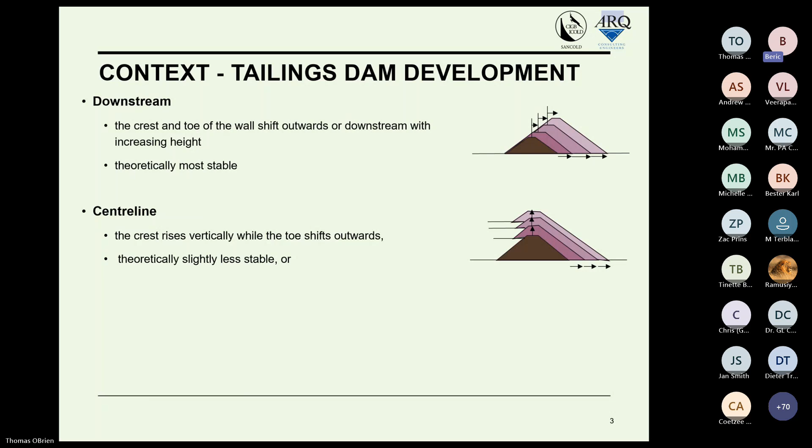And theoretically, this is slightly less stable because on the upstream side, you have essentially a near vertical face.

So upstream dams in South Africa have been developed in this manner, predominantly. Over 99% of them are upstream dams. And the reason for this is that the terrain in which they are developed is predominantly flat, mostly on the high veld and similar areas.

There are no valleys, and so this requires a ring dike dam, a containment wall around the whole impoundment. These long walls require a lot of material to form, which the deep underground mines that generate the waste generally provide insufficient waste rock to actually form the ring dike impoundment walls.

So then what happened is, in the semi-arid environment, the early pioneers found that the sun dried out the tailings very quickly, making these tailings a suitable material with which to actually raise the dam. And so we didn't need to build impoundment walls with any other material.

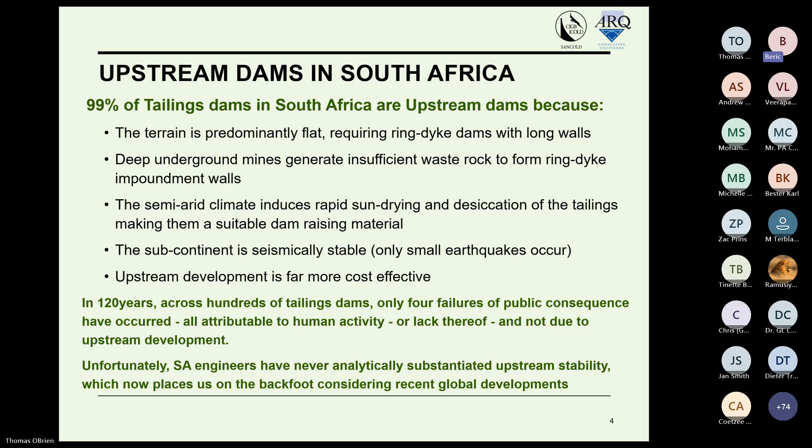Unfortunately, though, South African engineers have never analytically substantiated upstream stability. And this has now placed us on a back foot when it comes to the global developments that have happened in the last few years.

So, which is the bad rap that upstream tailings dams have now been experiencing. And this came about because in February 2019, the Feijão tailings dam in Brazil, near the town of Brumadinho, failed spectacularly. And that was also on public social media.

And so there was a huge public outcry, and the Brazilian politicians moved very quickly to ban upstream tailings dams. The investment agencies and the insurers, to protect investor value and profitability, exerted pressure on the mines to get their act together through the initiation of what is called the Global Tailings Initiative.

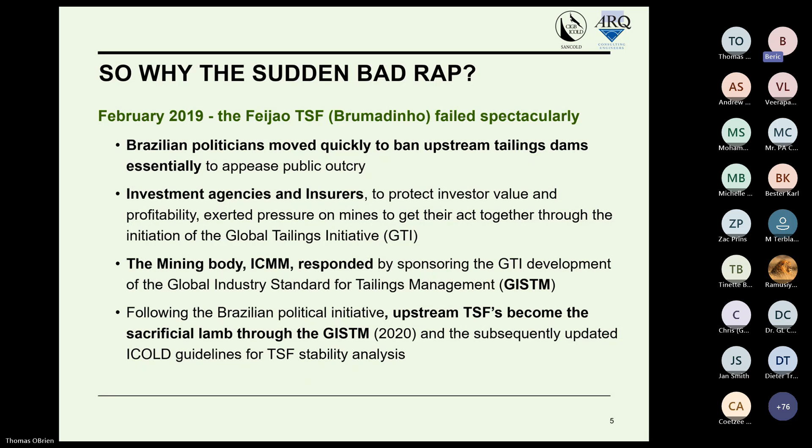And a mining body, the ICMM, responded by actually sponsoring the GTI in the development of what has come out as the global industry standard for tailings management, the GISTM. And following the Brazilian political initiative of banning upstream tailings dams, upstream TSFs became the sacrificial lamb in this document and the subsequently updated ICOLD guidelines for tailings dam stability.

So looking at this in a little bit more detail, the GISTM does not ban upstream dams outright, but it imposes criteria and standards that are virtually impossible to meet.

Particularly, the guide requires a factor of safety of greater than 1.1 when assuming post-liquefaction residual strength. This is the strength that happens after failure. And then putting that into a limit equilibrium analysis. When you put those two together, it's virtually impossible to achieve that factor of safety requirement.

So why did the GISTM assume residual strength and limit equilibrium methods? Well, the guide is motivated by investor and insurer interest rather than the mining company interest, with the former actually attempting to avoid the consequences of failure rather than allowing mines to engineer and manage to avoid failures.

And the reason that GISTM followed this approach is because historically the mining industry has not looked after or managed its facilities adequately, and are now facing the consequences of it.

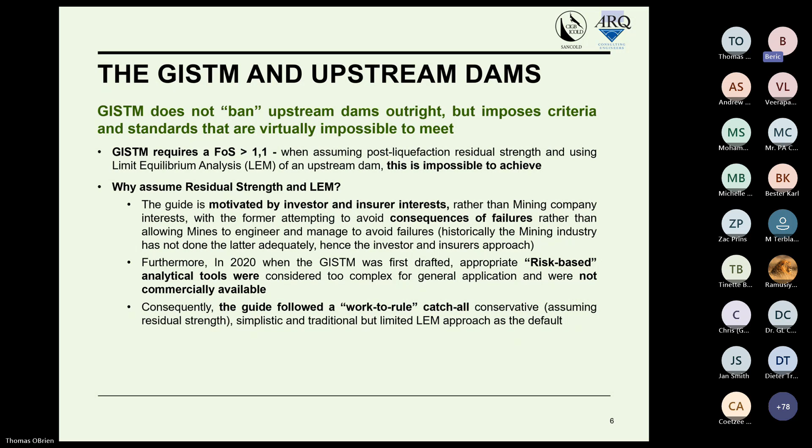Furthermore, in 2020, when the GISTM was first drafted, appropriate risk-based analytical tools were considered too complex for general application and were not commercially available. So consequently, the guide followed a sort of work-to-rule, catch-all, very conservative approach, assuming residual strengths, and the simplistic and traditional but limited limit equilibrium modeling approach as the default.

So where does this leave upstream tailings dams?

No upstream tailings dam can actually meet the GISTM criteria. But does this new standard suddenly make all upstream tailings dams unsafe? While the hazard and potential to cause harm exists, the South African record of around 50,000 tailings dam years, with only 4 failures of consequence, demonstrates otherwise. These tailings dams are not unsafe.

Condemnation of upstream dams may be largely immaterial globally, but they're hugely significant in South Africa to the economy, where more than 99% of facilities are developed in this manner. So some South African mines are in a quandary. They want to comply with global standards, but historic practice and international guidelines leave them in an impossible corner, with unattainable requirements and no alternative engineering options allowed.

So what can South African mines actually do now? We are suggesting that, contrary to the GISTM default approach, one should rather adopt a risk-based approach, which is actually allowed indirectly through the draft SANS 10286 Code of Practice. The GISTM work-to-rule approach is very prescriptive, it basically disempowers engineers and owners. It obviates owners, executives and engineers from applying their minds, they just have to follow rules. And so it basically lacks technical integrity, and is not an assured approach to risk management.

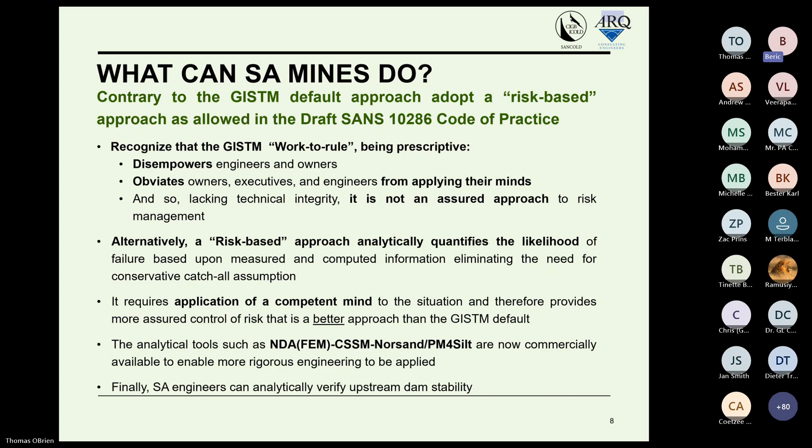So hopefully that provides you with some context as to why we are talking about this subject today. I'm going to hand over to Thomas now, who will take you through the analytical framework of how we actually go about undertaking the verification of the upstream stability.

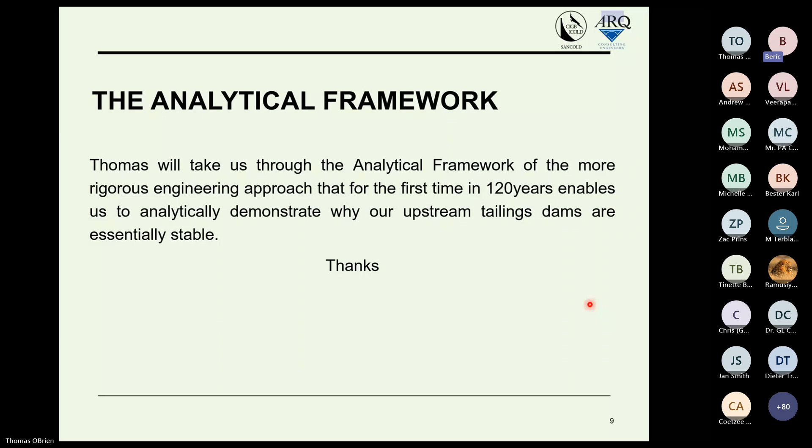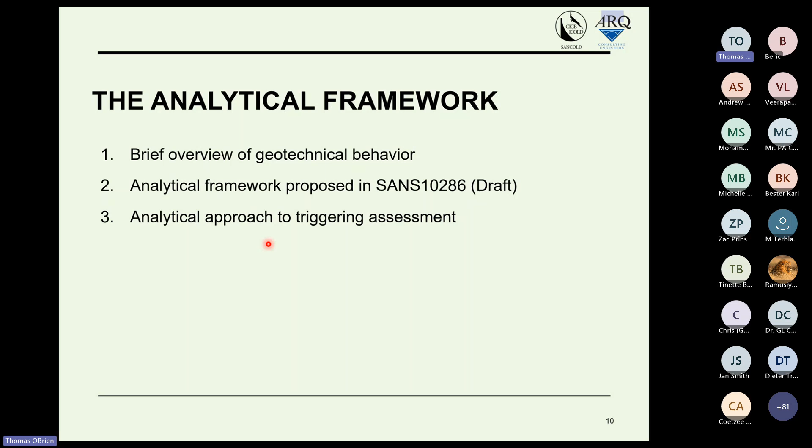Thank you, Thomas. Thanks for that, Beric. That's a very comprehensive summary, and good afternoon to everyone. I have the task of basically proving what Beric proposes to be possible. To accomplish that, I'd like to give a brief overview of some of the geotechnical behaviors concerned. For those of you who are geotechnical engineers, I apologize if a lot of it you already know, but for our audience I believe not everyone will be familiar, so there's value in it. Then we'll look at the analytical framework proposed by the SANS 10286 draft as an analytical approach for assessment.

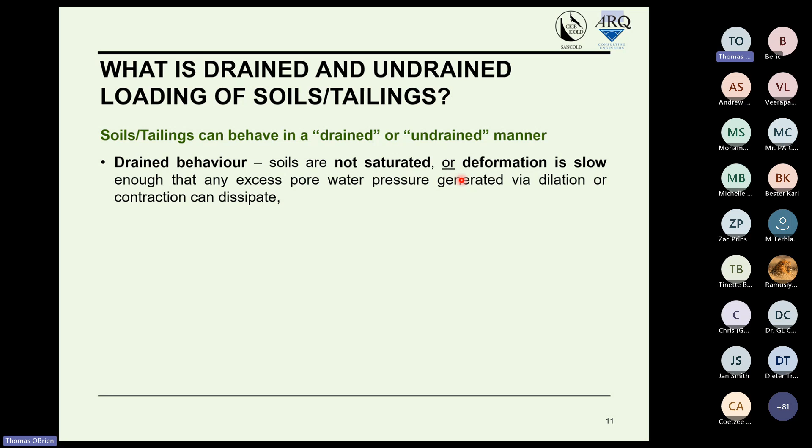And then we'll look at some of the modeling techniques used, as Beric mentioned, FEM over LEM and so on, to conduct triggering assessments. So let's take a look at some soil behaviors for overall orientation. Soils and tailings can behave in a drained or an undrained manner. In drained behavior, soils are either not saturated or deformation is slow enough to allow excess pore water pressures to dissipate. For undrained behavior to manifest, soils must be saturated and must also be sheared fast enough that excess pore pressures caused during dilation or contraction don't dissipate.

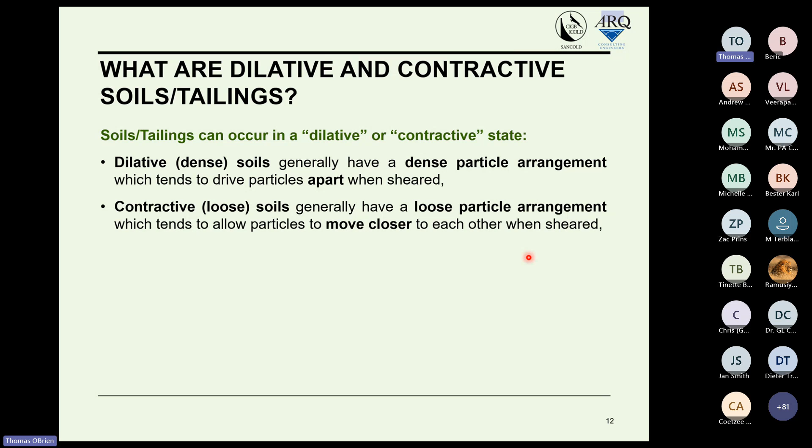So you might then ask, what are these dilation and contraction terms that I've mentioned? Basically, a dilative soil is a dense soil, which will make more sense later in the presentation. They generally have a dense particle arrangement, which tends to drive particles away from each other when the soil is sheared. Conversely, a contractive soil, or a loose soil, has a loose particle arrangement, which tends to allow particles to move closer to one another when the soil is sheared.

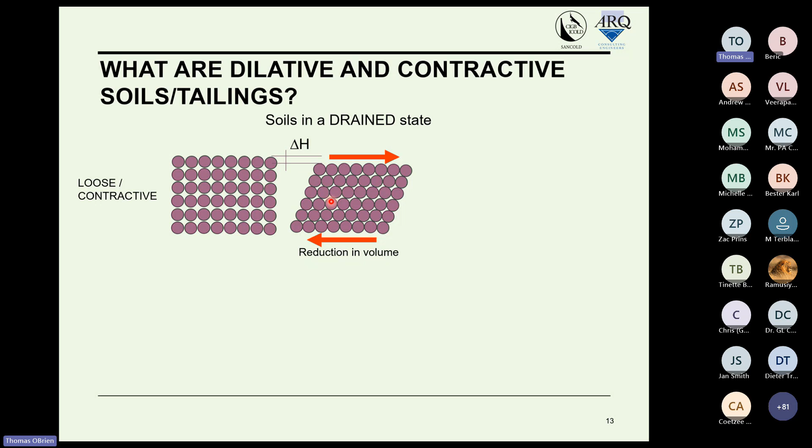It's helpful to visualize that by looking at the drained conditions. For a loose material, you'll note diagrammatically we've represented a loose soil with grains not packed very close together, but still making contact. When that soil mass is sheared, the particles are able to move closer to one another, so in the sample you get a decrease in height. In the actual tailings dam or soil mass, that would be associated with a decrease in overall volume, and an increase in shear strength with strain. Then looking at a dense state, a dense arrangement of particles, as you can see, they're much denser.

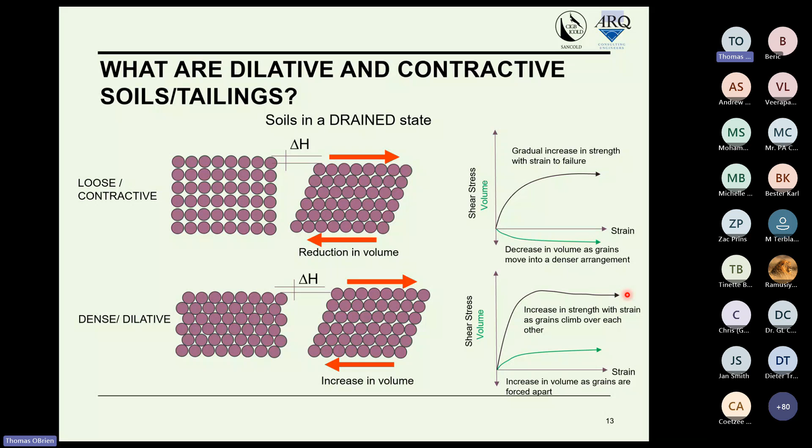When that is sheared in a drained fashion, the particles are forced to climb over one another during the shear deformation. And so you actually experience an increase in volume in the drained state, as you can see there by the green line. Also the shear strength increases and plateaus off at some high value because of the dense arrangement.

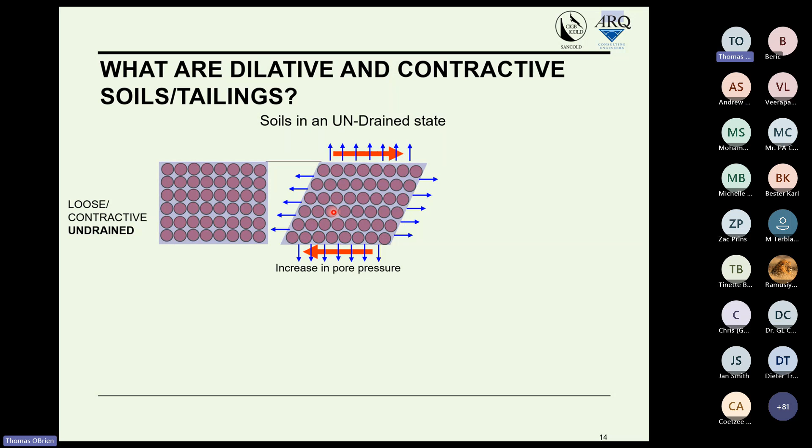Then we can look at the undrained behavior, and this is applicable to tailings dams because many of the structural zones are saturated. So again, we start by looking at a loose arrangement of particles or grains. When these are sheared, they want to move closer to one another because of their loose arrangement, but because they are housed within incompressible water, the volume can't change like it does during drained shear. And so the water actually takes on a pressure because of the will to decrease volume.

That increased pore water pressure actually reduces effective strength, or effective stress, and therefore strength. So this is the typical stress strain behavior of a loose material sheared in an undrained manner, where we have a peak and the strength then dropping down to a residual value. Corresponding with that, we see an increase in pore water pressure.

A much more desirable situation is if you have a dense material. When that's sheared in an undrained manner, the particles attempt to climb over one another because it started dense, but they can't climb over one another because the water actually goes into suction, and that suction holds the soil together and makes it very strong. So in that scenario, we see a decrease in pore water pressure, which is associated with an increase in effective stress and therefore strength. So there's no peak and residual.

You have finally, when that material does fail, it's quite strong, and it also fails on a plateau. So that's just a recap of those 4 scenarios. Apologies again, if you are already experienced geotechnical engineers, that's old news, but perhaps a recap doesn't hurt.

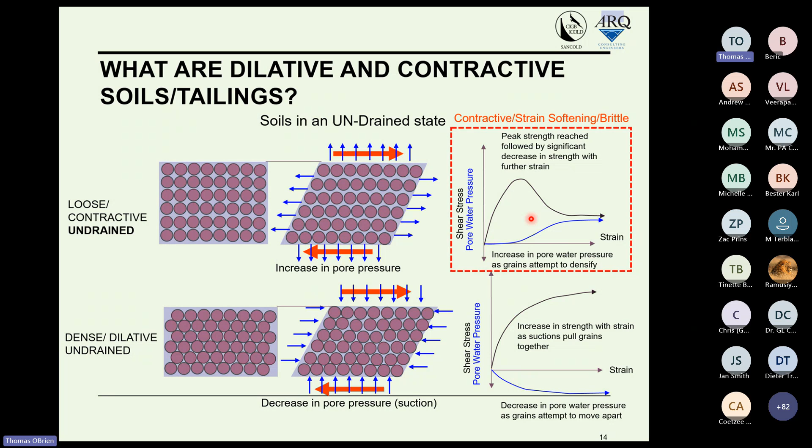The whole stability of these upstream tailings dams really hinges around one of the 4 permutations, the undrained shear of loose materials, where we have a peak and a residual. So if we are dealing with a loose or a contractive material, you still get different degrees of looseness or strain softening. I'd like to just elaborate on some principles there.

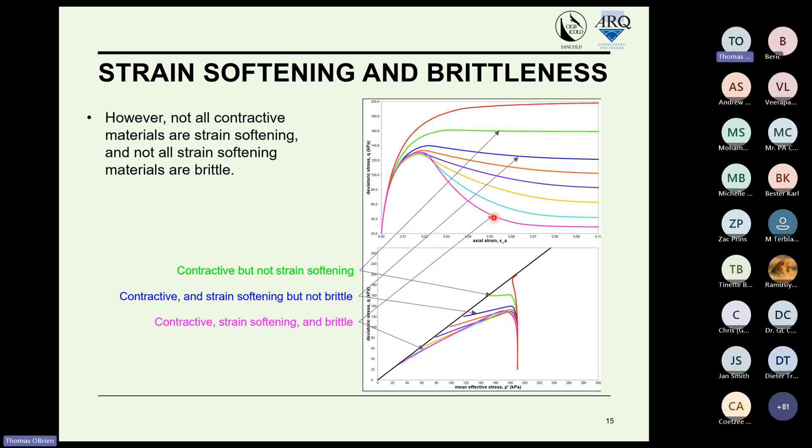And then the third case, which is contractive, strain softening, and brittle. As you'll see on the next slide, that last term, brittleness, basically refers to the amount of strength which is lost between the peak and the residual.

So the ICOLD Bulletin 194 has basically classed brittleness in 3 categories. If you are losing less than 20% of your strength, you are generally not brittle. If you're losing between 20 and 40% of your strength, you are in a moderately brittle scenario. And if you are losing more than 40% strength, you are highly brittle.

And that's important to understand because you obviously need to take precautions and perform proper assessments if you're dealing with something that is highly brittle, because there is the potential for liquefaction and it needs to be properly assessed.

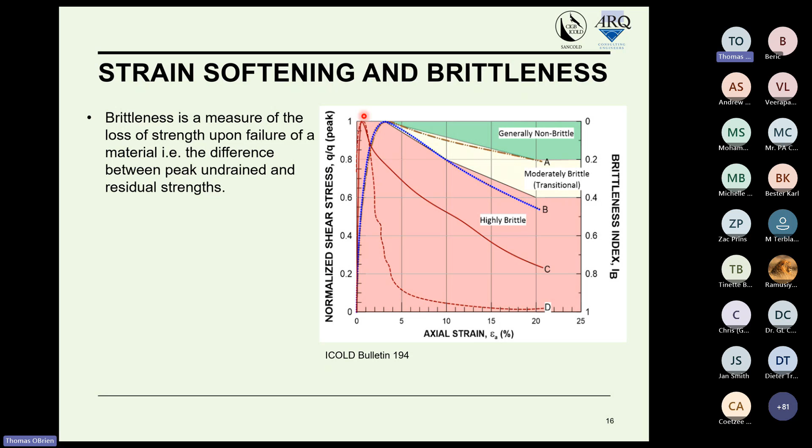For interest's sake, for those who haven't read the ICOLD Bulletin 194, this dashed line is actually the stress-strain relationship for a tailings sample tested from the Brumadinho failure, which Beric mentioned in his presentation, and that was a catastrophic liquefaction failure. You can see that material, when strained beyond its peak strength, really just liquefying and losing almost all of its strength.

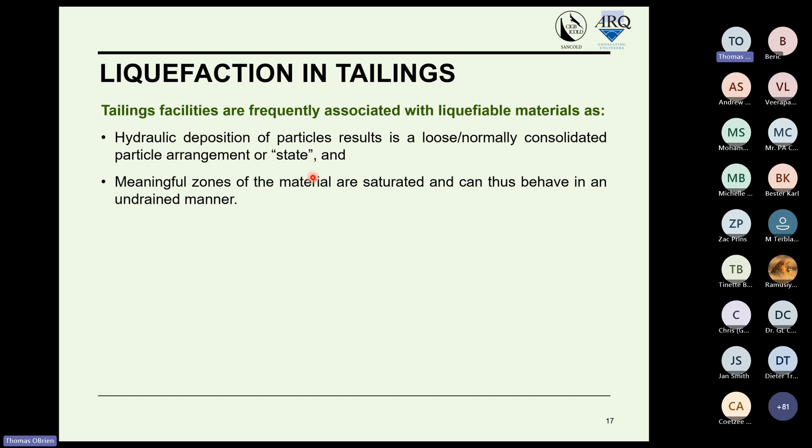So you may ask, why are tailings materials subject to liquefaction? Well, the hydraulic deposition of particles results in a loose or normally consolidated particle arrangement, and meaningful zones of the material are saturated, which can behave in an undrained manner. Therefore, if failure occurs, it is often associated with some degree of liquefaction.

So at this point, I'd like to take a closer look at two types of failure: static liquefaction and dynamic liquefaction. The diagrams I'm going to show you are not taken from any reference literature. They are my understanding of how these failures progress, and might be interesting to discuss after the webinar.

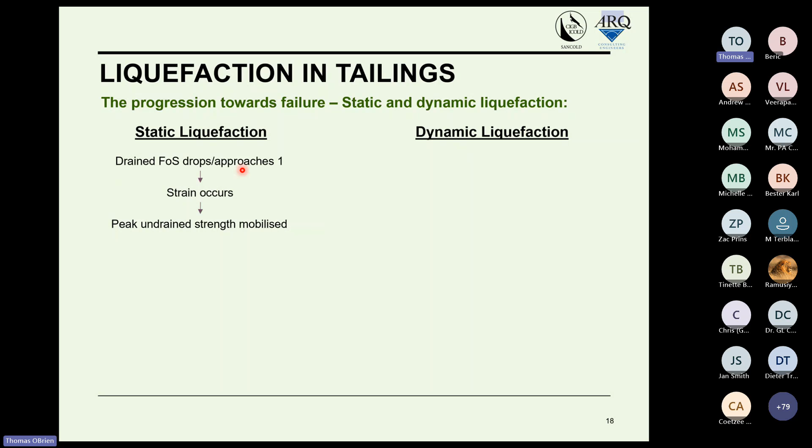Taking a look at static liquefaction, in my view, you must be in a situation where your drained factor of safety drops or approaches 1. Because of that, strains and movement occur. The movement mobilizes undrained strengths, which are peak undrained strengths at first. Then, if the peak undrained strengths are smaller than the stress or load, further movement occurs and residual undrained strengths are mobilized. If your material is brittle, then your residual undrained factor of safety will be much smaller than 1, and you'll have instability and flow failure.

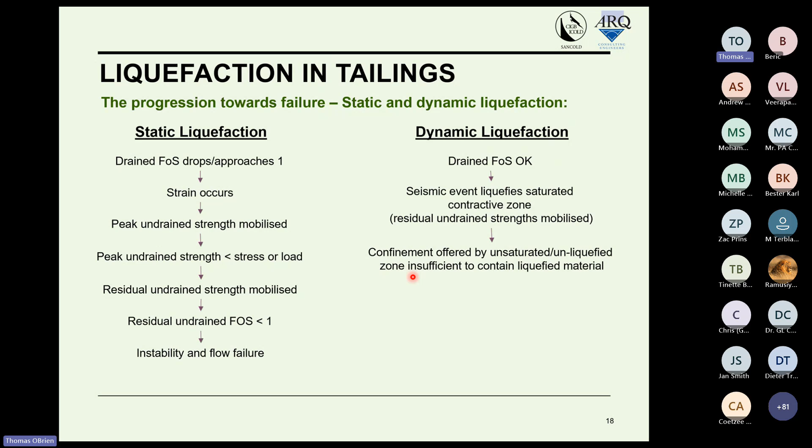Dynamic liquefaction, on the other hand, triggered by a seismic or earthquake event, has a slightly different mechanism. Your drained factor of safety can be okay, and then a seismic event can be experienced, which causes contraction in your saturated zones, and residual undrained strengths can be mobilized outright without first moving through a movement scenario, as with the static liquefaction case. The confinement offered by the unsaturated or unliquefied zone is insufficient to contain the liquefied material. Your global factor of safety drops below 1, and instability and flow failure can occur.

So in summary, it's important to note that in the static liquefaction case, you have failure first through several gates, as I call them, followed ultimately by a liquefaction flow failure. Whereas on the dynamic liquefaction front, you can have direct liquefaction first. In other words, the seismic event targets the saturated tailings material where it is, and causes it to go to a residual strength state, and then the outer wall can't contain that liquefied material, so it bursts essentially. Those are the distinctions between static and dynamic liquefaction.

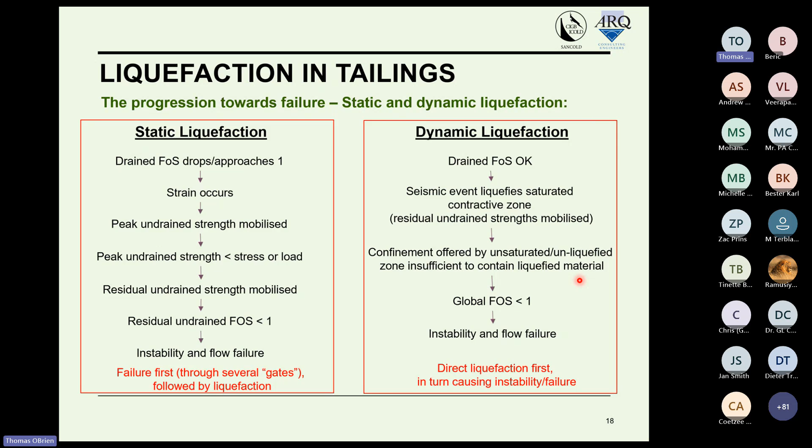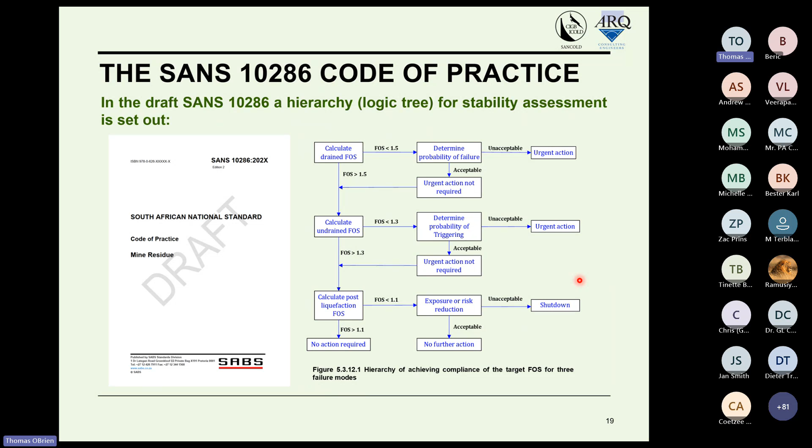So the new SANS 10286, although it's still in draft, I understand the document will shortly go out for public comment, and if there aren't significant public comments, it would be formalized in a state very similar to present. That document basically sets up a framework for assessment, which we are already using to assess stability of tailings dams, and this is more or less the flow that follows.

So the drained analysis is the first step, and defines the safety level that prevails in the absence of a trigger—the normal steady state scenario. As long as this is sufficiently high, the system does not move and does not mobilize undrained shear strengths. Here, the target for the factor of safety is 1.5, and if you have that, you're okay.

However, if your factor of safety is smaller than 1.5, the code makes provision for you to check for the probability of failure, and there are many references that can be used. KK Phoon has done a lot of work on reliability-based design. If you don't have a large standard deviation around your mean in terms of material strengths, you can have a factor of safety slightly below 1.5 and still have very good reliability—a very small probability of failure because of the predictableness of your materials. So that's the first drained assessment.

Then the stability analyst or designer must move to consider the peak undrained analysis as the second step. That defines the factor of safety that prevails in the presence of a trigger. By applying undrained shear strength properties in the model, we assume that the material is at peak undrained strength state.

So remember, we're still talking about the simplistic or old school stability analysis approach here. So we are assuming material parameters. So for this peak undrained state, we assume that all of our saturated contractive material is at the peak undrained, or in the peak undrained condition there. We require a factor of safety of 1.3.

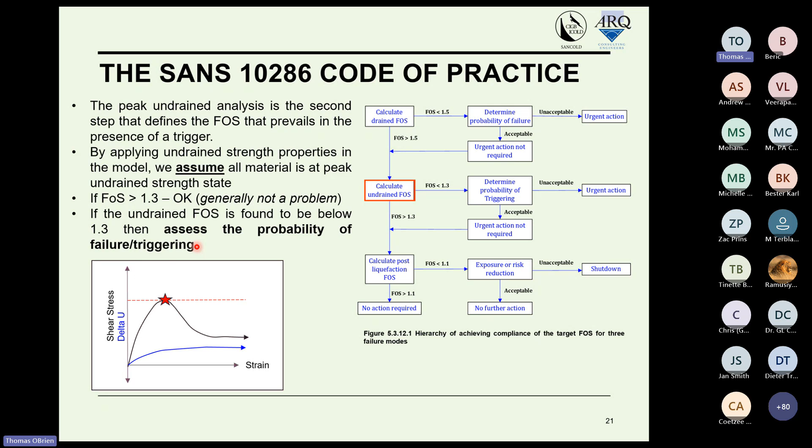This is not normally a problem even for our upstream dams to obtain 1.3 for that. However, again, SANS 10286 does make provision for assessment of probability of triggering if you don't quite meet that 1.3. However, I believe that 1.3 should be targeted.

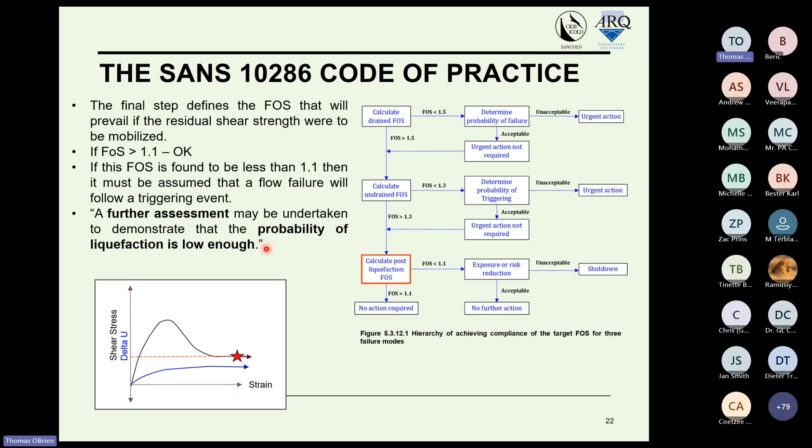However, if you're below that, a further assessment may be undertaken to demonstrate that the probability of liquefaction is low enough. And that really is the triggering analysis that we are hosting this webinar to address.

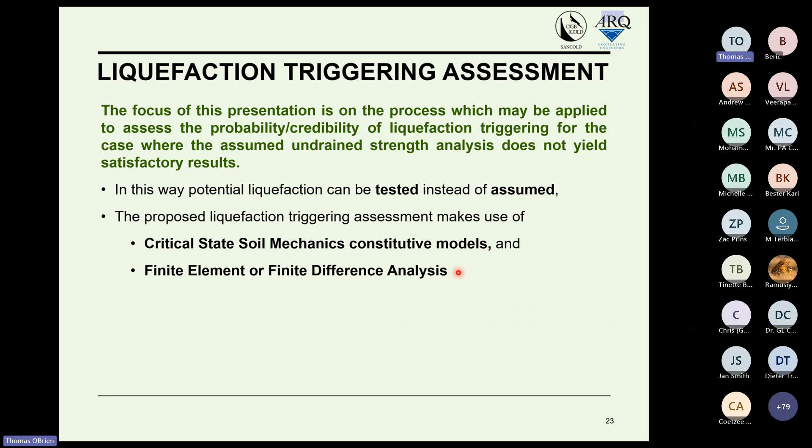And so to address or to test for triggering, instead of assuming residual undrained strength conditions, we need two things really. We need to employ the critical state soil mechanics constitutive model, and we need to use suitable software and analytical techniques, namely finite element or finite difference analysis. The old school limit equilibrium methods, or LEM, aren't able to fully consider the required constitutive models for triggering assessments.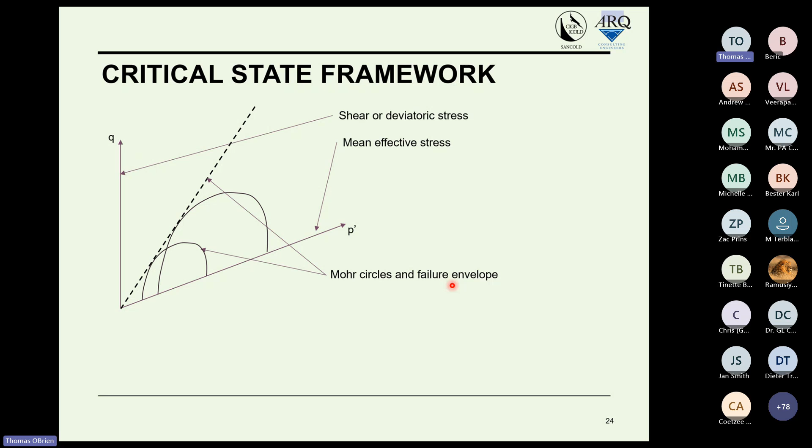So let's take a look at this critical state framework. So the PQ stress space might be familiar to you. On the vertical axis, we have the shear or deviatoric stress, and on the horizontal axis, we have the mean effective stress. That might be familiar to you because that's the stress space on which we normally plot the Mohr circles and the failure envelope.

Essentially, the critical state framework adds a third dimension to the constitutive model to introduce density or void ratio. The two are interchangeable there. So we go from a two-dimensional constitutive model, only suitable for simplistic analyses with assumed strength conditions, to an advanced critical state framework, which is able to consider changes in density and void ratio.

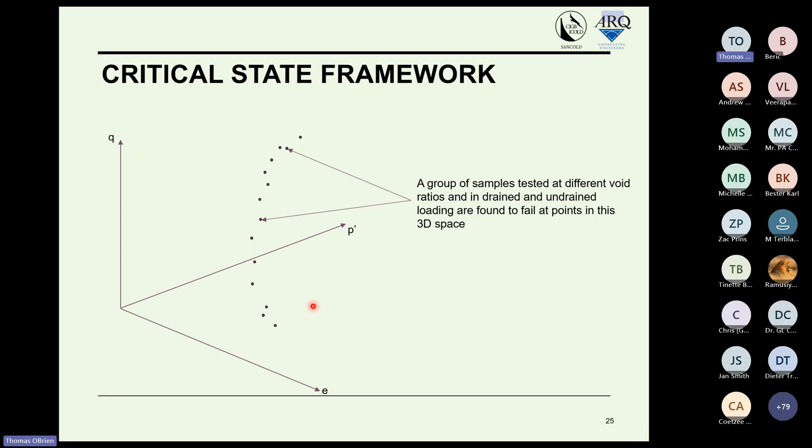So essentially, if you were to take a group of samples and test them at different void ratios and in drained and undrained load scenarios, and plot their failure points in 3D space, you would see a series or a band of points, something like what I've shown on my slide here. These points basically align to form a failure line, and this is what we call the critical state line, critical state locus, the CSL. Quite a buzzword nowadays - I'm sure you have heard about it.

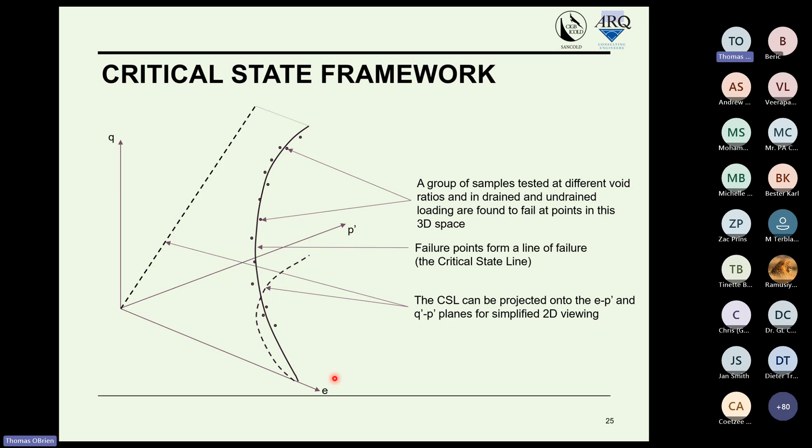And then to simplify visualization of behaviors, we tend to simplify this 3D model into two 2D viewing planes. So we'll frequently look at the QP plane - as I mentioned, that's the one where you have your Mohr circles conventionally plotted. And then we also look at the PE plane, which we'll take a closer look at in some of the upcoming slides. So let's take a look at how some of these loose versus dense, drained versus undrained materials behave in this critical state framework.

So we can start by taking a look at loose, undrained shear. It's loose, which means we must be starting with quite a high void ratio - your volume of voids versus your volume of solids is quite high. So we're here. And then we shear that sample, or let's say the element in the tailings dam is sheared. Because that shear is happening in an undrained fashion, there's no change along the void ratio axis. It has to stay at one void ratio value - otherwise, it would be drained, not undrained.

And if you shear that sample to failure, it basically comes up and fails on the critical state line. So having a quick look at the projections there, on a QP space, that's our typical leftward curving stress path that we know to be a contractive material. Having a look in EP space, we note a straight line moving to and failing on the critical state line without a change in void ratio.

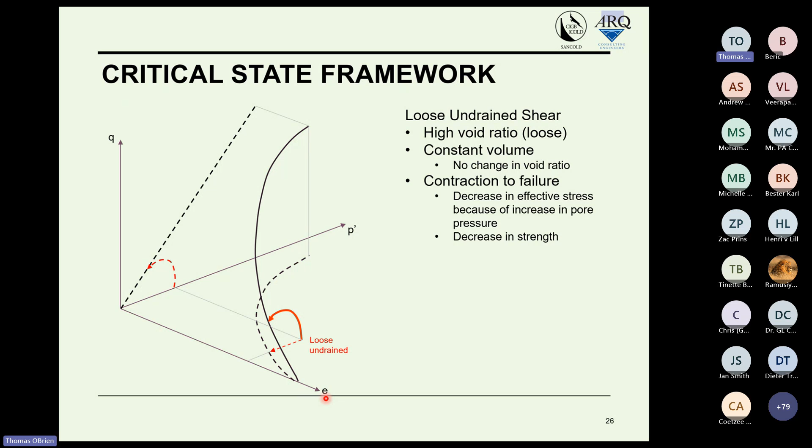The model can obviously also handle dense behavior, so dense undrained behavior in this case. Now, as I've mentioned, it's denser, so we start with a much smaller void ratio. And instead of contracting, this material, when looking at the QP plane, actually dilates up to failure. And looking at the floor of the 3D model at the EP space, again, we can't change void ratio, but we come from the other side of the critical state line and experience failure on the critical state line.

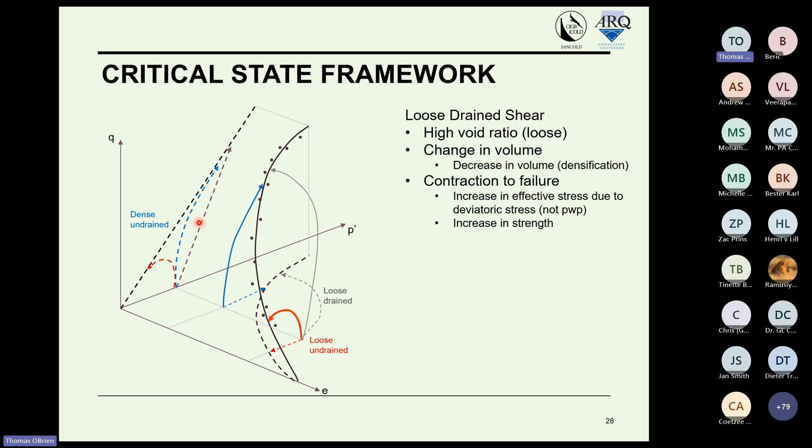Then we can look at our two drained scenarios. I won't, for time reasons, talk too much on them, but basically, because it's drained, volume can change. So our loose sample densifies and fails on the critical state line when looking at the floor of this plot. And when looking at QP space, we have a straight line stress path, which moves up and fails on the projection of the critical state line. A dense sample obviously again starts with a smaller void ratio, and also moves to fail on the critical state line, and it would follow a similar 1 in 3 gradient straight line on the QP space.

Right, so that's sort of a summary of the 3D model that we're using. And just to emphasize again, when using a critical state framework, it's not necessary to assume one of the 3 predefined material states, but rather you're able to model the movement in this 3D stress space with development of the facility and with triggers.

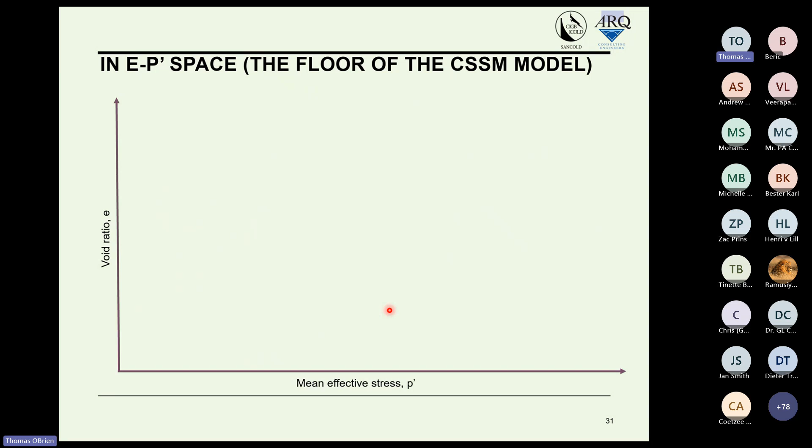All right, I believe I've just inadvertently covered those points, so I'll move over them. You might be a lot more familiar with this plot. So this is now looking at the floor of the critical state framework with void ratio on the vertical axis and mean effective stress on the horizontal axis. So we have our critical state line dividing that space.

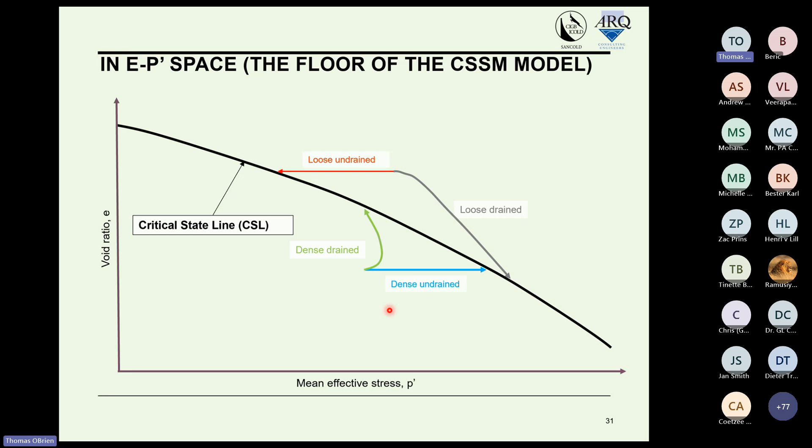As I've mentioned, the loose undrained materials are going to fail from right to left onto the critical state line, as shown there by the red arrow. Your dense undrained materials fail the other way onto the critical state line because they initially start dense of critical, not loose of critical. And then your dense drained failure also is allowed a volume change and generally moves upwards onto the critical state line.

So any element within a tailings facility can be placed either above or below the critical state line. If its void ratio in situ places it above the critical state line, then it has what we would term a positive state parameter, and we would say it's contractive. If the in situ state of an element in a tailings dam sits below the projection of the critical state line, we would say it's dilative and it has a negative state parameter, and it's not prone to liquefaction as the contractive materials are.

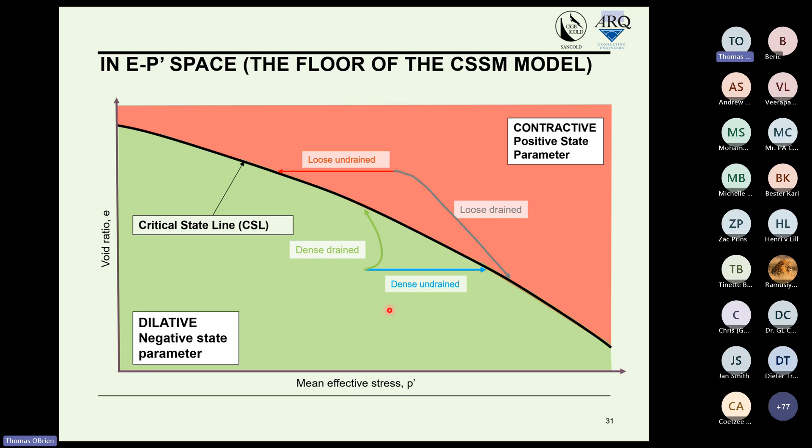Okay, so then we can move on with the constitutive models understood. I hope everyone did understand it. If you haven't had experience with it before, it can be a bit much to take in, but if you sit and have a look at some of these plots, they do start to make logical sense.

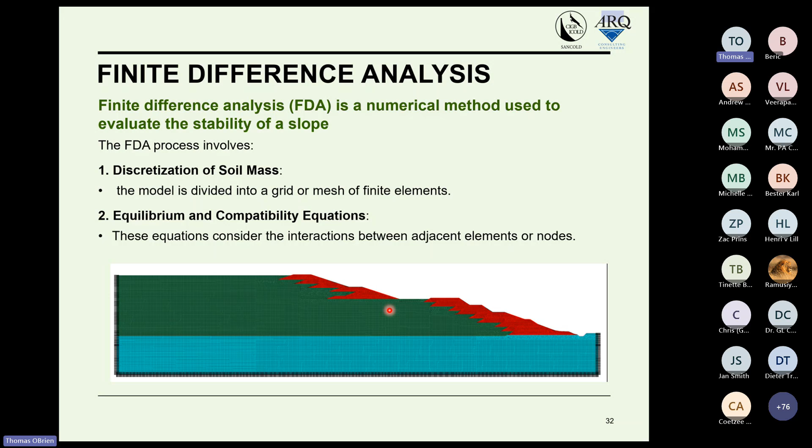But with an understanding of the constitutive models in place, we can look at the analytical methods and software. So when conducting a triggering assessment, you need to make use of a finite difference or a finite element numerical method. As I've mentioned, using LEM is not good enough. The finite difference or finite element method discretizes your soil mass into a finite number of elements, and then it applies equilibrium and compatibility equations between the elements and iteratively solves towards convergence.

You obviously need sophisticated inputs for a sophisticated analysis. They say if you're going to guess the inputs, you may as well just guess the answer, and that's completely true. So in terms of material properties, you're going to need a good understanding of strength, stiffness, and density. Katy is going to take us through some of the forms of investigation and talk through how we derive these parameters. But just know that these properties influence how the elements deform and or resist deformation under different loading conditions within the bounds of the selected constitutive model, and that the material parameters are specific to the constitutive model that you're planning to use.

So far, I've just talked about a critical state framework, but there are different models within the critical state framework, for example, Cam Clay, or PM4, NorSand, and they each have some nuances and differences there with regards to the input parameters.

So once you've understood your parameters and your modeling and you've actually computed your models, you would look at your outputs. Katy's going to show us some nice examples of outputs, but just note that your outputs are numerous and you can look at stresses, strains, and displacements.

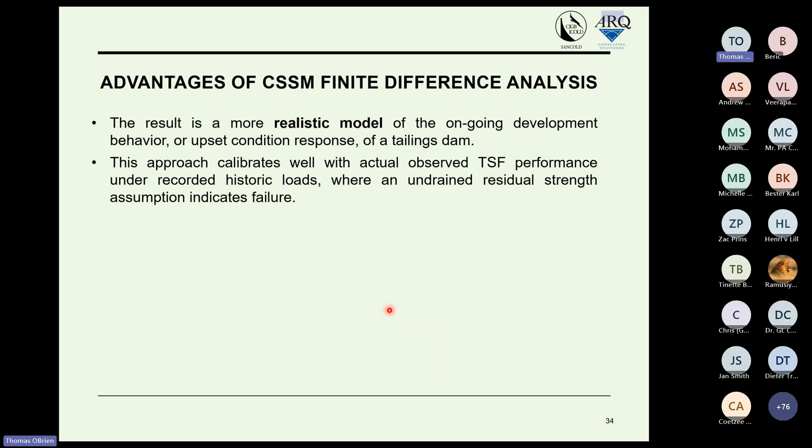So in short, the result when using a critical state finite difference software is a more realistic model of the ongoing development behavior or upset conditions of a tailings dam. This approach calibrates well with actual TSF performance under recorded historic loads, where an undrained residual strength assumption would have otherwise indicated failure. All right, so that's it from my part.

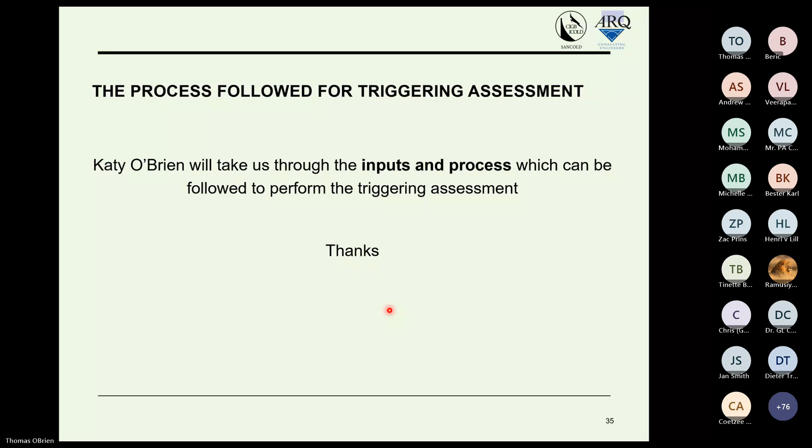I'll be going through the life cycle of triggering assessments, as Thomas just briefly mentioned. That life cycle would firstly be to conduct a site investigation, which would include the collection of samples, followed by lab testing using the samples collected during the investigation, then interpretation of the testing, calibration of constitutive models, and then developing other inputs for the analysis.

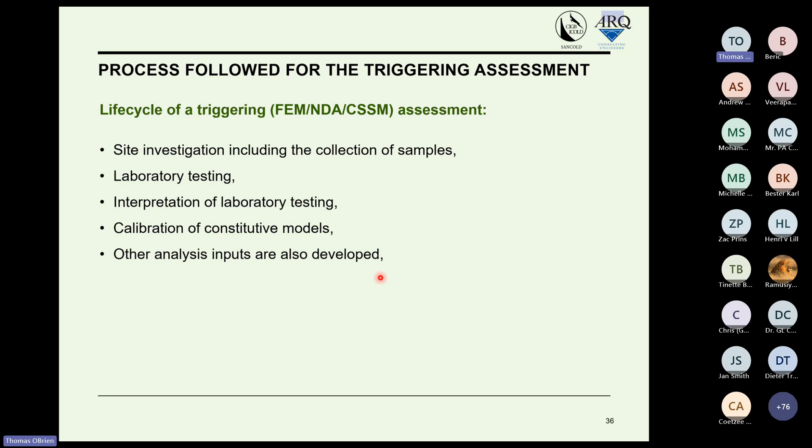All 5 of those points would be done for the purpose of developing the inputs for the actual analysis, which Thomas has mentioned will be a non-linear deformation analysis, utilizing critical state soil mechanics for the potentially liquefiable material zones. Lastly, interpretation of the results. In the upcoming slides, I'll go through each of these points individually.

Let's start off with the site investigation. One of the most important components is cone penetration testing, which gives you a very good indication of the state of your tailings. You can empirically derive the void ratio and state parameter of the tailings.

The testing also includes pore pressure dissipation tests, which allows you to calculate your at-rest pore pressures. The CPTU testing also has a seismic cone, where seismic cone tests are conducted to derive your small strain shear stiffness, so that you can develop a stiffness profile with depth throughout the tailings dam.

Rotary core drilling is also commonly conducted, which allows for the collection of undisturbed samples in the tailings dam. Quite often the rotary core drilling is advanced through the tailings dam and down into the foundation, which allows for collection of foundation samples, and also for testing like SPT testing in the foundation to give an indication of stiffness.

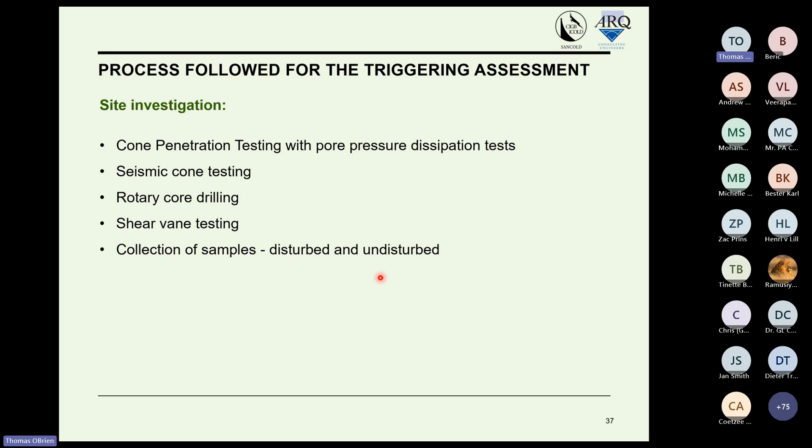It should be noted that the contractor that conducts the site investigation is responsible for actually doing the work on site and recording the data, but they do not interpret the results. It is the responsibility of the engineer to do this and to specify where tests are required and would provide the most meaningful output.

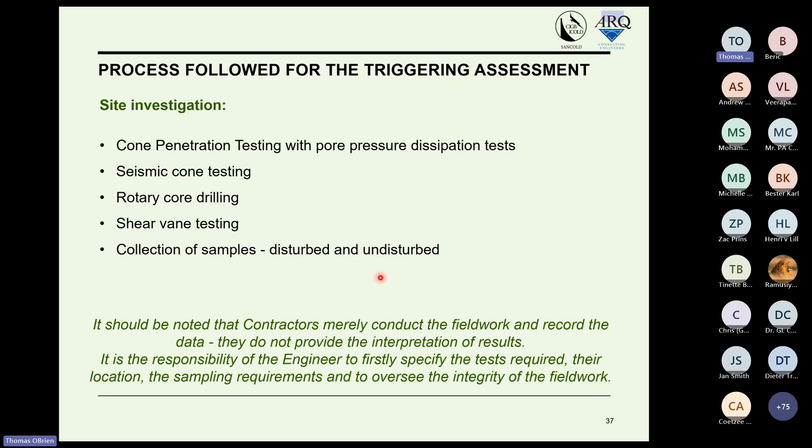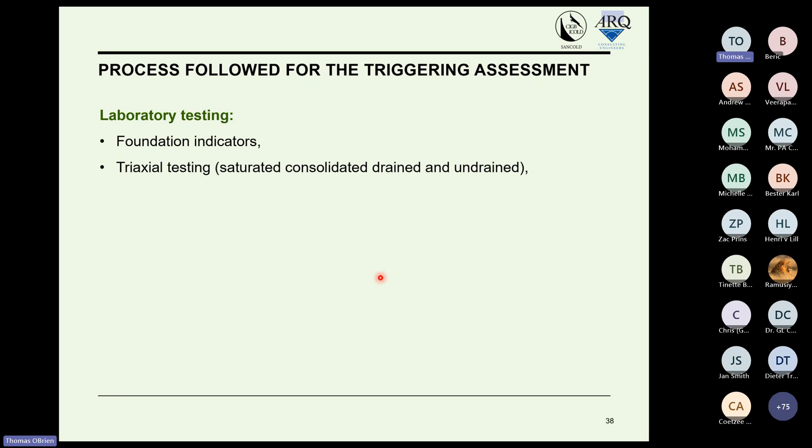Moving on to lab tests. We commonly conduct foundation indicator tests, triaxial tests, which could either be drained or undrained, slurry consolidometers, flexible wall permeability tests, monotonic direct simple shear (MDSS) tests, and cyclic direct simple shear (CDSS) tests.

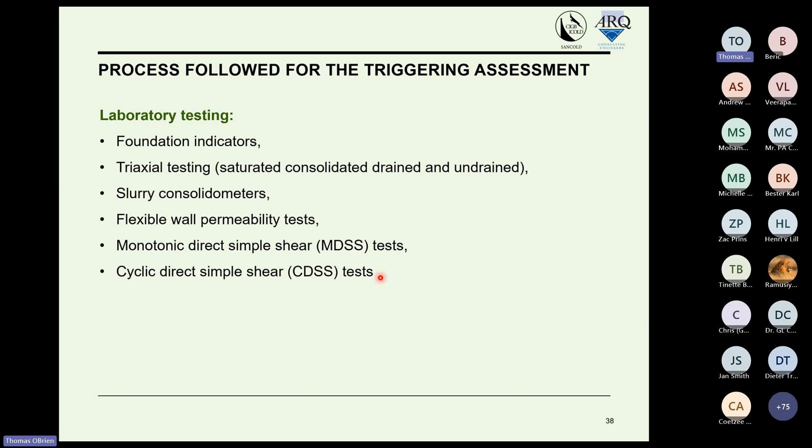With all of these tests, you can fully define a material's behavior in terms of consolidation, permeability, and strength. Once again, it should be noted that the lab merely conducts the lab test and records the data. They do not provide the interpretation, because this is the responsibility of the engineer, who specifies what tests should be conducted and then interprets the results once they are complete.

Let's go through the interpretation of some lab tests. This is not in terms of the critical state framework that I'll be going through in some of the upcoming slides. This is just general lab test interpretations.

This plot on the top left of the slide is a plot of hydraulic conductivity versus void ratio obtained through flexible wall permeability tests. Each discrete point is a separate test, and the different colors represent different material types. Typically we would use these test results to derive trends of permeability versus void ratio, as shown by the red line plotted through the dark red points for the overflow material in this instance. We would then use these relationships or trends as input into our analyses.

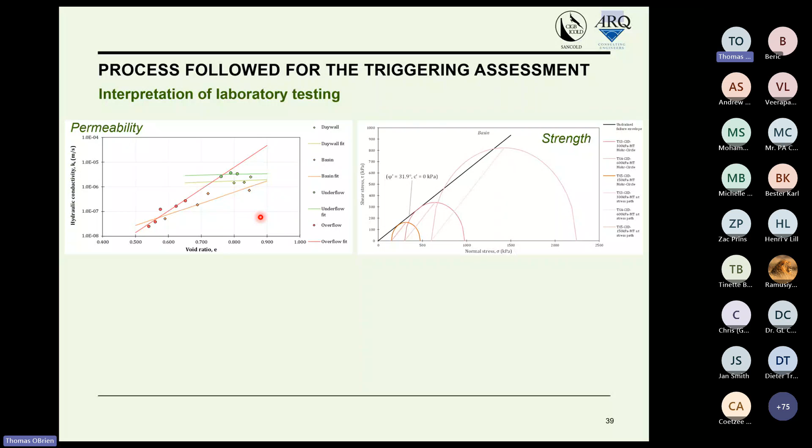The second plot is a derivation of Mohr-Coulomb shear strength parameters using the Mohr-Coulomb circles with the failure envelope drawn tangential, and a friction angle of 31.9 and cohesion of 0 were derived.

Lastly, these are the outputs of some CDSS tests conducted on two different material types, one red and one orange. As would be expected, looking at the cyclic stress ratio, which is the aggressiveness of the shear or the amount of shear applied to the sample, we see that as the CSR increases, the number of cycles to failure on the sample decreases.

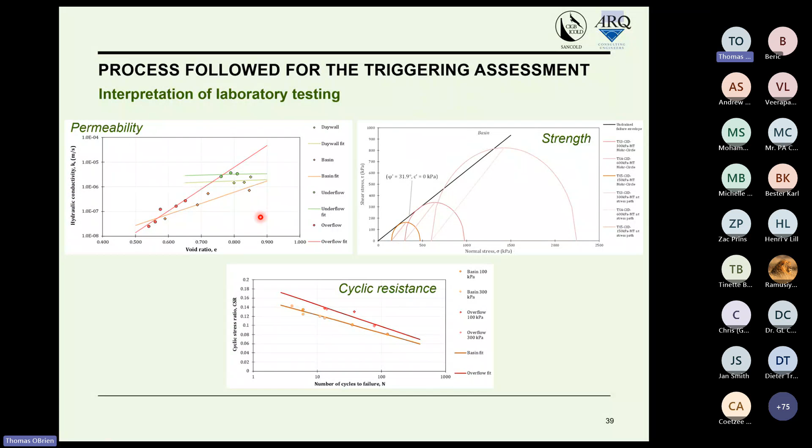Let's move on to the calibration of the critical state constitutive models. We make use of two CSSM constitutive models, NORSAND, which we use for potential static triggers or static stability assessments, and PM4 SILT, which is used for dynamic or seismic potential triggers.

The NORSAND model requires 8 main input parameters. The PM4 SILT model requires 6 input parameters. So they are fairly complex models when compared to, for example, the Mohr-Coulomb model, which only requires 2. It should also be noted that the PM4 SILT model involves a whole bunch of other secondary parameters that are usually left as default or are inherently calculated or calibrated within the software package you use.

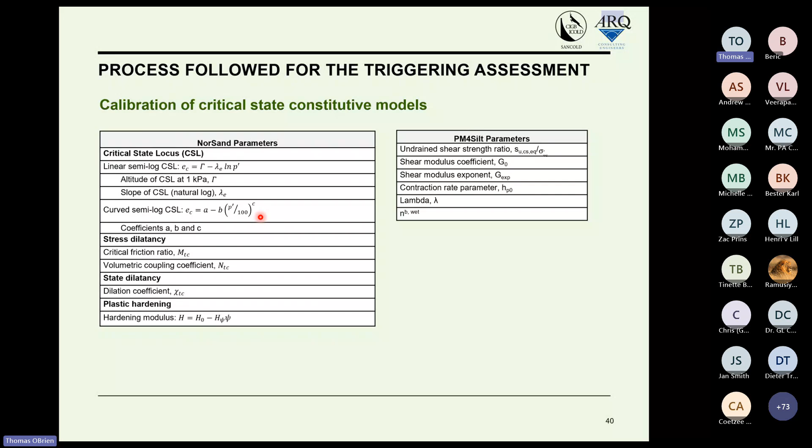One of the best ways of calibrating these constitutive models is to use the lab tests we've discussed. This is a photograph of a consolidated undrained triaxial test, with the specimen shown before the test on the left and after the test on the right. It's basically a saturated cylinder of soil with an axial load applied until failure occurs. We have various output plots or data from this test, and our aim in calibrating the constitutive model is to simulate this test in the finite difference software and adjust the input parameters.

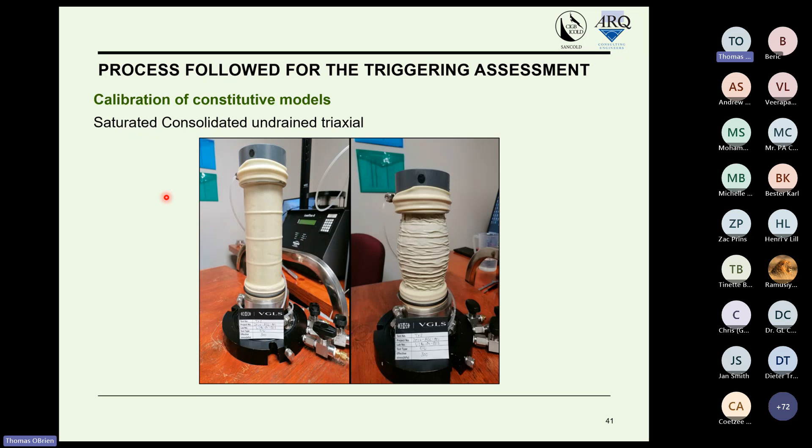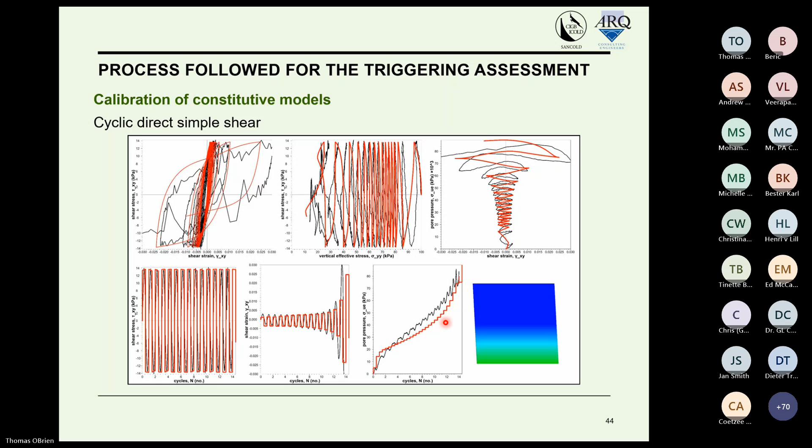So we've now derived all of the parameters that we need to inform these constitutive models, and we need to assign them to the actual model of the facility to conduct the triggering assessment.

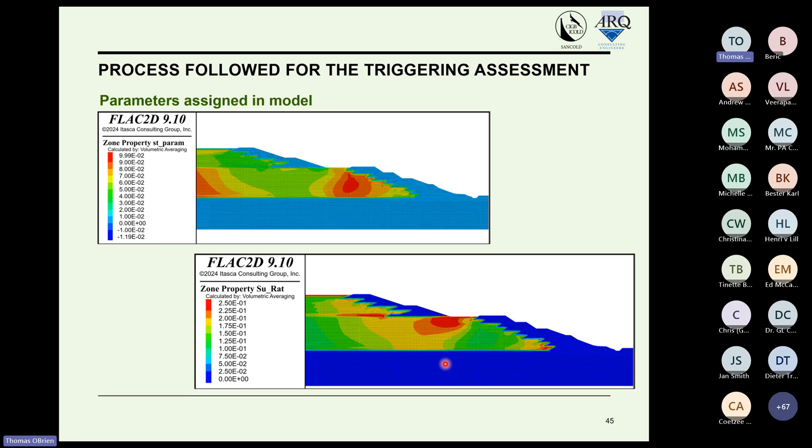So the higher the state parameter, i.e. the red zones, are more contractive than the green. Based on these state parameter values, the residual undrained strength ratio, which is an input parameter to the PM4 silt model, is calculated and assigned to each of the zones in the model individually.

We also need to consider that we've sort of covered the calibration of the potentially liquefiable tailings, but there are many other inputs to an assessment such as this, including the foundation profile, where we would have to derive strength, stiffness, and density parameters for each of the individual foundation profile layers. This could involve a process as complex as that for the tailings, especially if some of the foundation material is potentially liquefiable.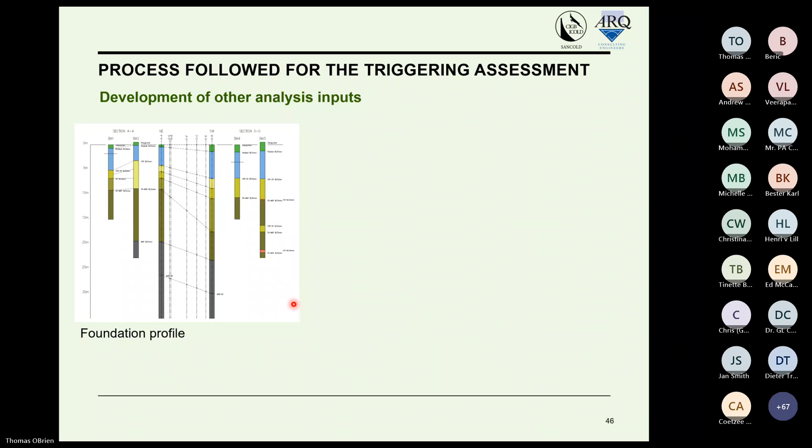The time history signal is scaled to represent an earthquake with a specific return period. In this case, it was a 1 in 10,000 year return period. That return period is selected based on the consequence classification of the facility, which is a requirement of both GISTM and the SANS document.

When we actually perform the analysis, we have to develop different potential triggers and impose them on the model and look at how this affects the tailings dam. There are different triggers we can look at, divided into two categories: static triggers and dynamic triggers. Some examples of static triggers would be normal development of the facility. If the facility is developed too high or too fast for excess pore water to dissipate, this could be a potential trigger for static liquefaction. Raising of the phreatic surface in a blocked drain scenario is another one. Loss of confinement, which could occur through, let's say, the mechanical removal of the toe of a facility, is another potential static liquefaction trigger.

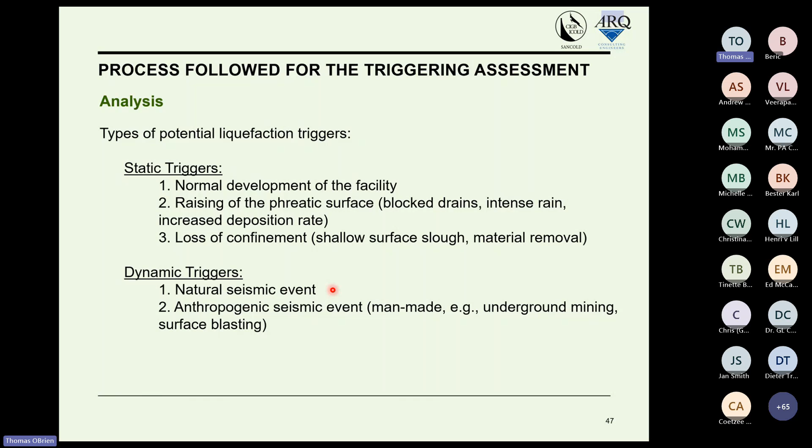Then we move on to the dynamic triggers, which are divided into two classes. There are natural seismic events, essentially tectonic earthquakes, and anthropogenic seismic events, which are man-made events brought on by underground mining or surface blasting.

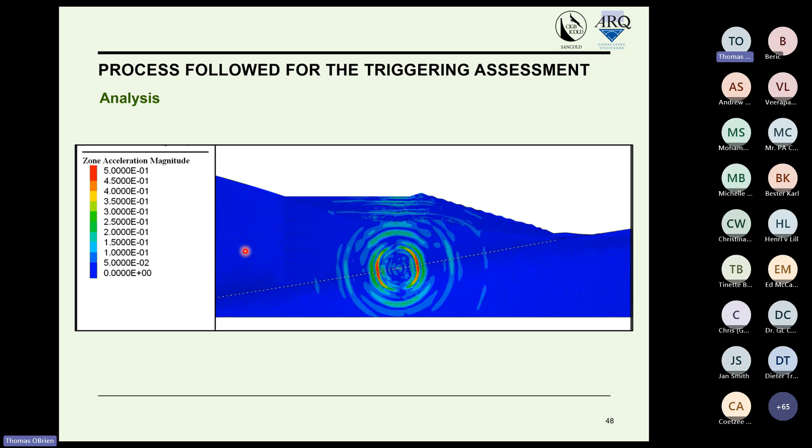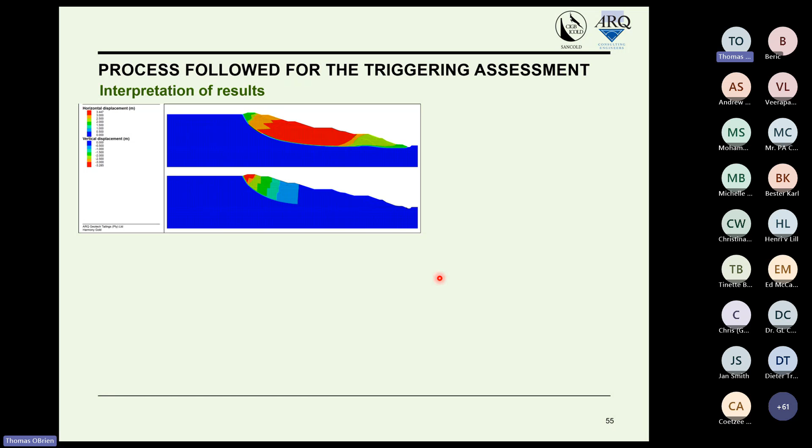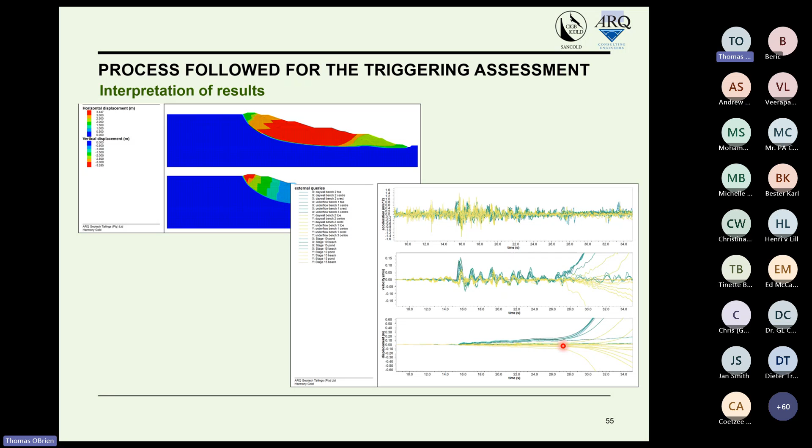When we look at the plots of horizontal displacement, there's a clear circular slip failure that's formed. Looking specifically at the displacement, we can see it exponentially deviates from the x-axis at around 27 seconds of the 35-second signal.

To conclude the presentation, very few tailings dams in South Africa will meet the residual strength requirement laid out in SANS 10286 Code of Practice and in the GISTM.

The SANS Code of Practice does, however, make allowance for assessment of the probability of liquefaction, and in this presentation, a means of assessing the potential or probability of liquefaction through a triggering assessment is demonstrated.

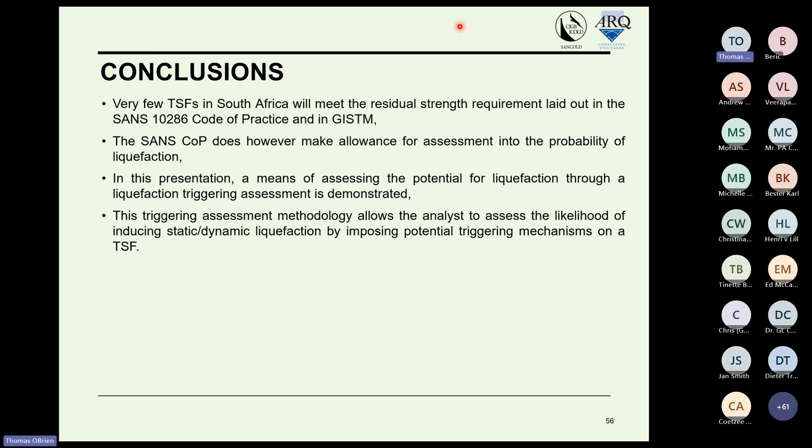The triggering assessment methodology allows the analyst to assess the likelihood of inducing static or dynamic liquefaction by imposing potential triggering mechanisms on the tailings dam.

The key to ensuring the soundness of this rational engineering approach is to verify the accuracy and representativeness of the analytical method and modeling, as well as to consider all credible triggers.

The stability assessment of tailings dams requires a high level of information and skill to produce reliable results on a case-specific basis. And that's it.

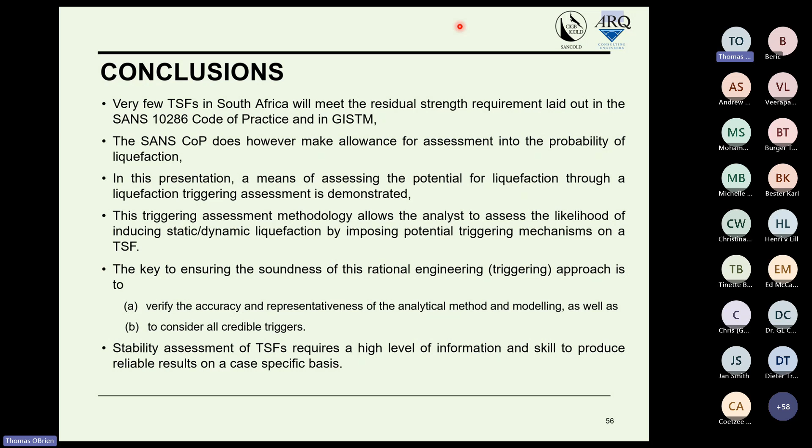Maybe let me jump in and say yes, it has. The scope of the standard is very broad, from stability to operations. We've obviously focused specifically on the stability framework, given the topic of the webinar, but if you're interested, I would encourage you to go and have a look—it is very broad and comprehensive.

If I may add, the GISTM is quite explicit in procedural conformance, compliance, and reporting, particularly heading into the public domain. But the key to a tailings dam is continual management of it, and a mine would do well to develop a specific management system for its specific facilities, enhancing what is actually specified in the GISTM. The GISTM is very much a check-afterwards approach, whereas the tailings dam is developed on a 24/7 basis, and if you really want to manage the risk, you need to do so on that same 24/7 basis.

Thank you, thank you, Alan, you can make your comment. Thanks, Beric, thanks very much. Beric, if I may chuck some stones into the pot.

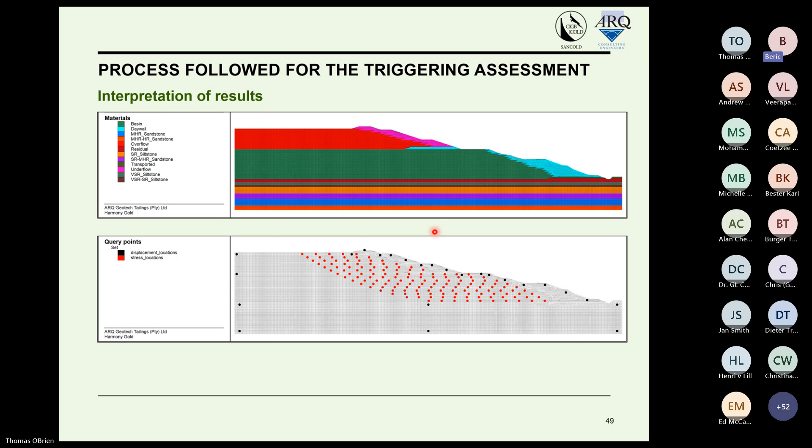When you have mines with very high production rates, particularly in remining of tailings where you're generally processing at 10 times the rate of an underground mine, if you tried to build a tailings dam with a daywall or spigoted dam, you would need dams 10 times the size of what we currently see, and there's never enough space or land available to do that.

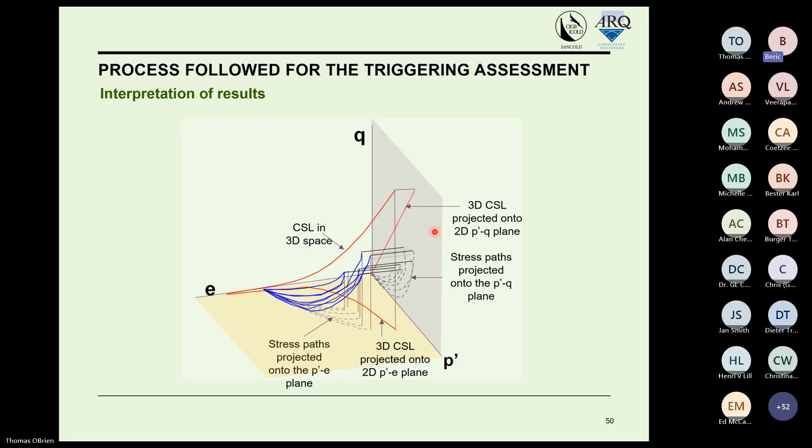So we had to develop a different approach, using a hydrocyclone, which classifies the tailings into a coarse fraction and a fine fraction. The coarse fraction can be used to build the containment wall because it consolidates and is dewatered to a large extent, at a much higher rate of rise. So you can have a smaller footprint area and greater water recovery.

That development of upstream cyclone dams is essentially the subject matter this webinar has been about, because whilst you create a superior underflow material with which to build the wall, you also create an inferior overflow material, which is what you're trying to contain. In upstream development of a dam, the failure surface actually goes through that inferior material, so it's particularly pertinent to rigorously understand its behavior.

So I don't know. Thanks, Beric, for the excellent explanation. Maybe Ashley can arrange a whole webinar to give us more on this. Anyway, thanks very much for the explanation. A pleasure, Alan. Thank you so much.